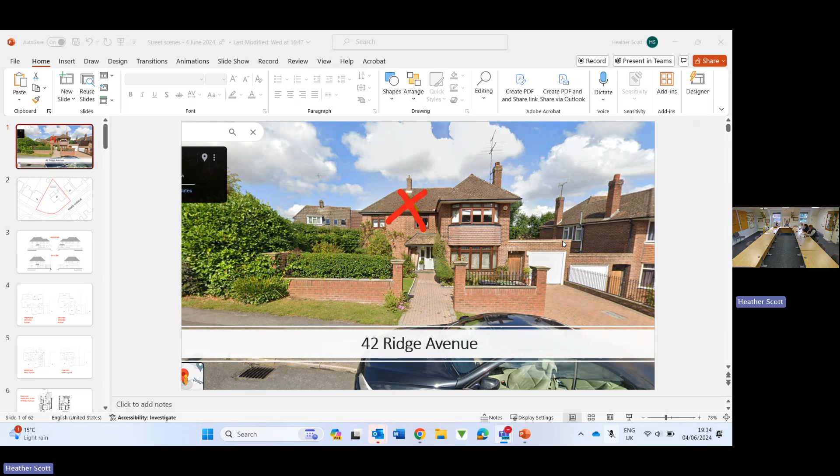Page 10. Right, okay, so you've got your little screenshot packs just in front of you to help you to understand. So 5/2024/0666 and 5/2024/0753 are not required for consideration. So 42 Ridge Avenue. The property sits on a spacious corner plot with the garage linked to the garage at number 40 Ridge Avenue.

The proposal is looking to demolish the garage and replace with a two-storey side extension partially up to the boundary of number 40 at ground floor and stepped in by 1 metre at first floor level. The rear projection at ground floor extends to be in line with the existing conservatory, and at first floor level extends by 1.8 metres beyond the first floor building line. The road slopes downwards towards number 40, therefore the application property already sits on higher ground.

An application at number 40 was approved in March 24 for a two-storey side extension partially over the footprint of the garage and extends much further rearwards than this proposal. This approved proposal removes any possible loss of amenity that could have been considered to the occupants. There are no additional bedrooms, just the addition of bathrooms and a study. The garage is lost as part of the proposal, but there appears to be parking provision for 3 cars on the frontage. Not conservation area, consider no objection.

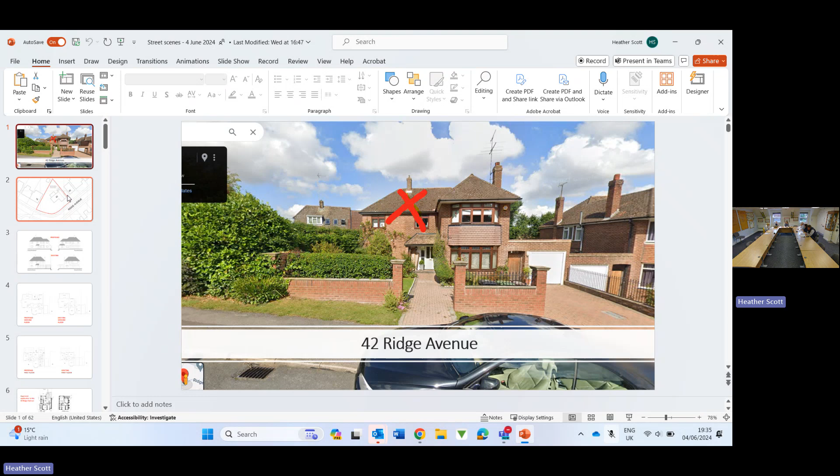And is that number 40 to the right? So number 40 has not done their extension on this photo. This photo is obviously one of my standard ones, from Google Street View. But I did include within your pack the proposals. Yeah, so slide number 6 shows you what they're proposing to do, which is quite substantial actually, to be honest, and that's been given permission already.

Any comments? Anybody objected to it? No. Are we happy with that? Yeah. Happy. Thank you.

Reference 5/2024/0738, 12 Church Field, Harpenden. It's 0748 that didn't meet the criteria. Oh, I missed one. So I think we've skipped the page actually. I'm so sorry. No, I missed that. So 5/24/0293.

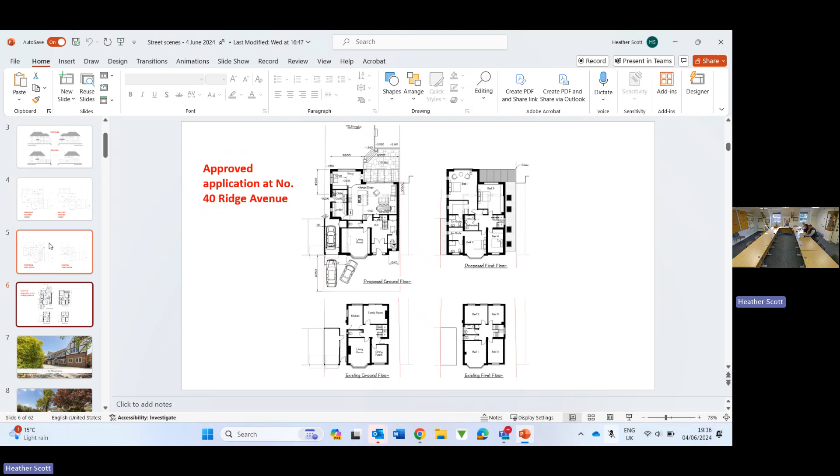Number 19. Okay. The proposal at ground floor is looking to change the 2 existing front bay windows to be box bay under the existing roof overhang and a small infill extension to the side of the existing children's den room to expand the family room. At first floor, it's proposed to add a small extension to the side of bedroom 2, along with the conversion of the existing bathroom to create a bedroom. Internal reconfigurations are also proposed to create a bathroom to the front.

Property is already of a good size and able to accommodate these additions easily with little aesthetic difference. And I say consider no objection. Nothing online, I assume. No, so I'll let you know if there is anything.

The drawing. Oh, you like my colour? Well, the drawing was actually part of the planning application, but the colouring was mine. Oh, right. Just to make it very clear. Very skilled. Yes, a steady hand. Yeah.

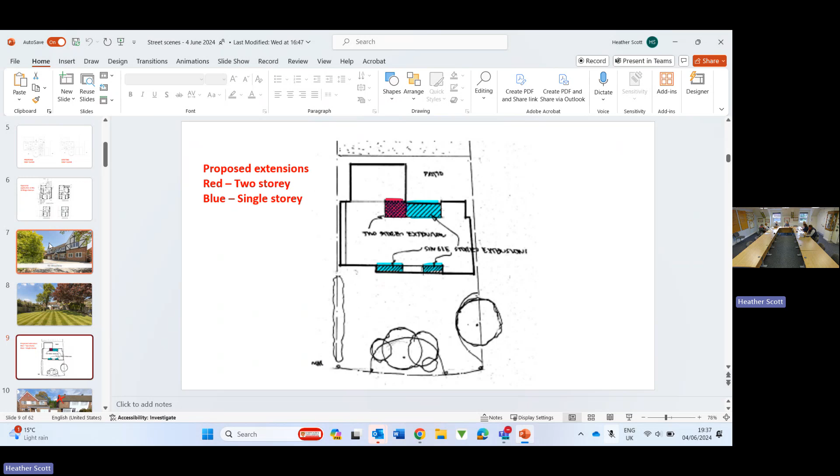Okay, so now on to, are we all okay with that? Yeah, sure. Now on to 12 Churchfield, 5/2024/0738. Okay, the proposal is looking to replace the existing flat roofed entrance porch with a two-storey front extension to provide an enlarged entrance area and ensuite to the master bedroom first floor. Further, smaller ground floor front extension is also proposed to enlarge the living room.

The two-storey extension projects 850 millimetres further forward than the building line of the garage, and the ground floor extension projects 1150 millimetres further forward than the neighbouring property's front building line, which is at number 10. Although the 45-degree visibility zone has been shown to not be obstructed, there are no additional bedrooms being added. And I say consider no objection, subject to no loss of amenity to neighbouring properties. Policy ESG 2 of the neighbourhood plan and 72 of the district plan apply.

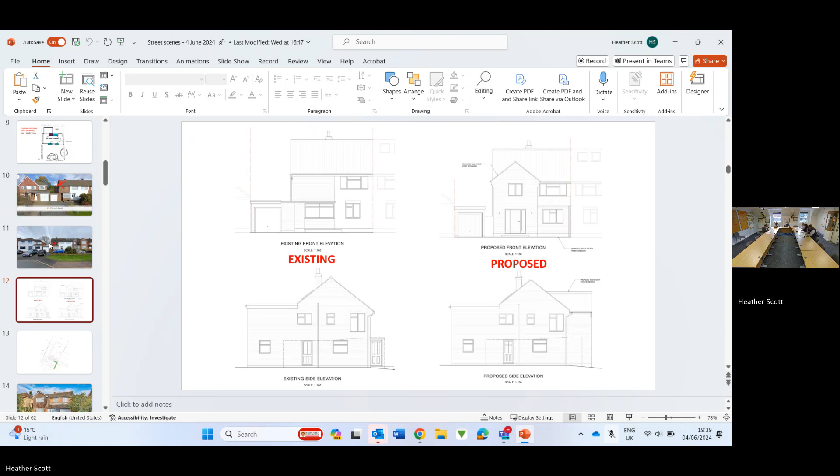Is it semi-detached? Yeah, so it's linked by the garage. Well, actually, sorry, so it's linked to the garage to one side and the semi-detached to the other, yeah. Both the ones either side seem to have done something. Yeah, they have. So, but actually, they're not building over the garage. They're just changing the frontage, yeah. Garage is still staying a flat roof. Fine. Everyone happy with that? Yeah. Yep. All good on that one.

The next one is 5/2024/0739, 6 Townsend. Okay, proposal is mostly adding a wraparound extension at ground floor level to expand the ground floor living accommodation and a porch. There is no extension at first floor level, but the roof ridge height is increasing by 950 millimetres to provide an additional bedroom, which will be 5 in total, and an ensuite in the roof space. Neighbouring property at number 8 Townsend Lane is a relatively new build with a ridge height of 9 metres. This proposal will extend the ridge height to approximately 8.5 metres. 3 dormers and 4 front Velux windows are to be added.

The road slopes up, therefore number 4 sits on lower ground, although the increase in ridge height does not appear to have a detrimental impact on them. The site is in the conservation area. So I say consider no objection, subject to no loss of amenity to number 4 Townsend Lane, and the design and materials are deemed to be acceptable in the conservation area. Policy ESG 2 of the neighbourhood plan, 69, 72 and 85 of the district plan apply. There's no objections from the neighbours? No.

Straightforward. Yeah, so I mean, the ones to the left, if you look in the pictures, this is quite, yeah. I think a number of them on Townsend Lane, to be honest, are beginning to take on that sort of larger change. Yeah. So the only comment that Jane asked me to add in on this was there's obviously been quite a few traffic accidents on Townsend Lane. And maybe some comment around that they enact the correct traffic management or something like that.

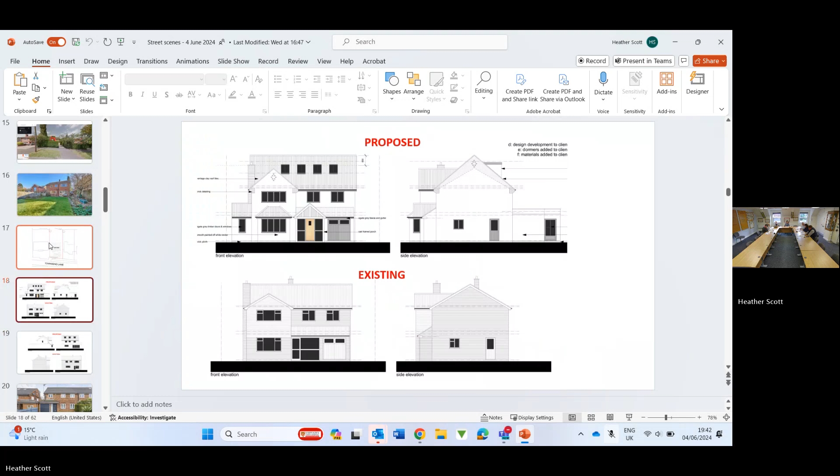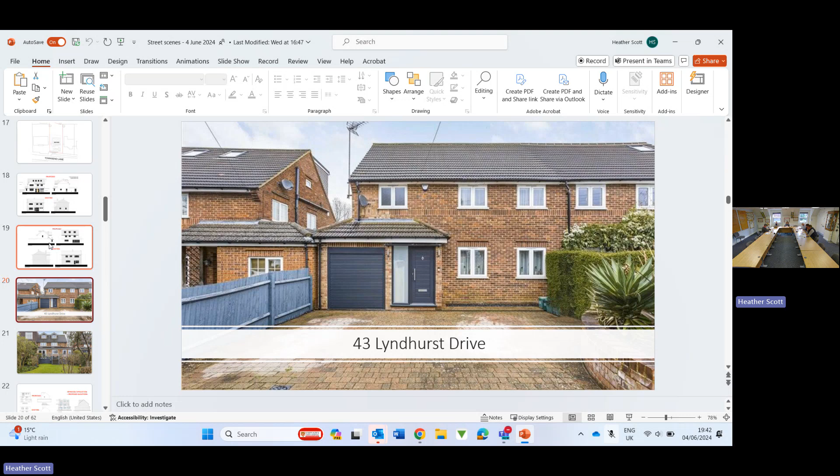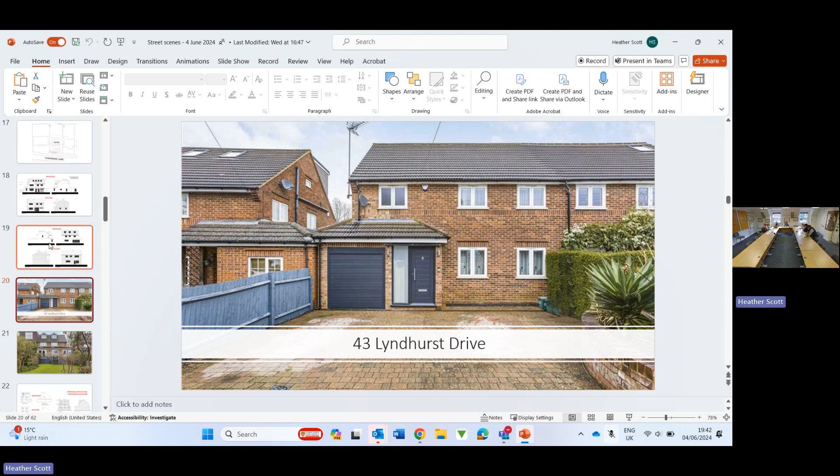Great, so moving on to week commencing the 14th, 17th. 5/24/0235 does not meet the criteria, but 5/2024/0546, 43 Lyndhurst Drive does. Okay, planning permission was granted in 2020 for a very similar proposal to this application, which is to essentially replace the two rear dormer windows with a flat roof dormer from the ridge. This proposal has very minor amendments to the approved scheme in the form of changes to the windows and slightly to the size of the dormer. Photos of the rear of the property show that the connecting neighbouring property already has a rear dormer window similar to this proposal. So I've said consider no objection.

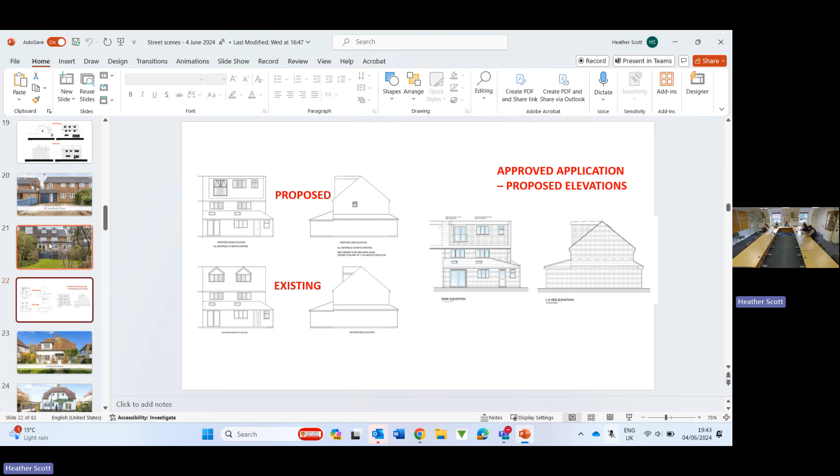Everyone happy with that one? Yeah, fine. Thank you. The next one is 5/2024/0828, which is 9 Stuart Road.

The property has a certain style and character and is locally listed in the conservation area. The proposals are at ground floor level to extend rears by 6.5 metres to fall in line with the neighbouring property's building line at number 11 Stuart Road, and in line with the detached garage at number 7, which is positioned in the rear garden, as is the case with this property.

A new garage to the side, which extends partially down the side, also forms part of the ground floor extension. At first floor, an additional bedroom and ensuite is added partially over the footprint of the new rear extension. A further bedroom, which will total 5, is to be added to the roof space along with Velux windows added to the flat element of the crown roof.

The roof space development is not visible from the street scene. Proposed design and materials appear to be sympathetic to the host dwelling and don't detract from its character. The site is set back from the road with an extended driveway across the verge from the highway with good tree and foliage screening. There appears to be at least 2 off-street parking spaces and a proposed attached single garage also.

No tree works, and I'd say consider no objections, subject to the proposal not being detrimental to the character and style of the host dwelling, which is locally listed in the conservation area. Policy ESD2 of the neighbourhood plan and policy 69, 72, 85 and 87 of the district plan refers. The only comment online actually comes from Herts Ecology, which recommends, due to the age of the property, that a bat survey takes place.

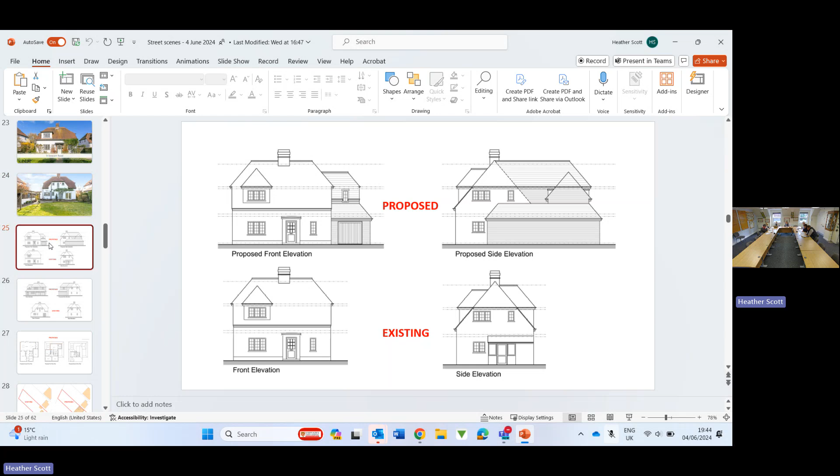Which will be making dramatic changes to the roof. Yeah, it's quite a bit, it's kind of tripling in size, isn't it? Yeah, I think it's one of the original ones, and if you look at the properties either side, they've already expanded. They're definitely extended, haven't they?

Any thoughts or concerns from anyone? Shame, it's one of the traditional houses. Yeah. I'm sure it'll be fine. No objections from me. No, there's no objections. Okay, we're all happy with that one?

Did you want me to add some additional wording to the recommendation that relates to a bat survey being conducted? Just leave it as it is. Would planning automatically do that? Planning will pick that up from what Herts Ecology have said. Yeah, because they were consulted the same as us, same as Herts Highways. So what would you normally do?

I think probably on the basis that it's a recommendation due to the age rather than actually feeling that bats are definitely present, I'm happy to leave it that Herts Ecology have responded with that comment and district will pick it up anyway. Yeah. Okay. Everyone else happy with that? Yeah. Thank you.

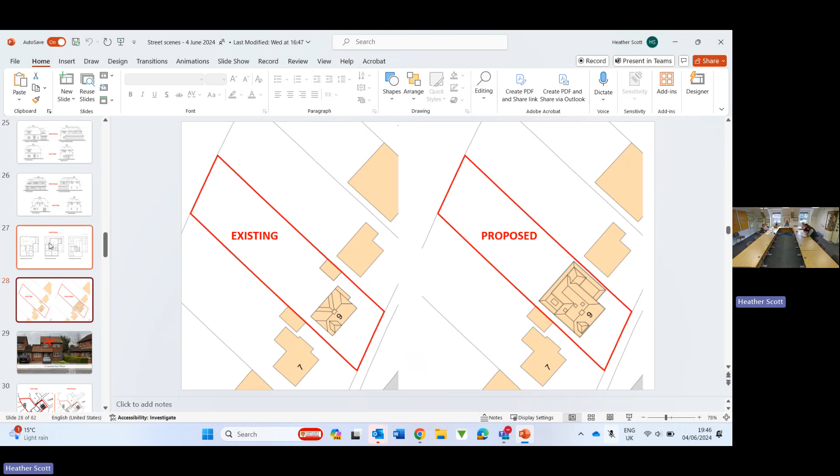The next one, 5/2024/0800, is not applicable. The next one, 5/2024/0818, is 5 Camberley Place. Okay, the property sits on an end plot with a large garden to the side. Proposals are to add a wraparound extension across the rear over the footprint of the existing conservatory and down the side at ground floor level to provide large open plan living accommodation.

A first floor extension is also proposed over the footprint of the side ground floor extension element to add a 4th bedroom at first floor. There is currently a 4th bedroom detailed at ground floor, which is to become a playroom. The properties in the street scene are positioned quite close to each other, number 6 Camberley Place being in quite close proximity to the application property.

There's only a 1 metre gap to the boundary from the proposed side 2-storey extension and a further 1 metre gap from the boundary to the neighbouring property, which could be deemed insufficient to prevent a detrimental effect on them. There is parking provision for 2 cars off street, unchanged from existing. The number of bedrooms based on the drawings also remains unchanged. So I said consider no objections subject to no detrimental impact on number 6 Camberley Place from the proposed 2-storey side extension. Policies of the neighbourhood plan and the district plan refer.

Anything from number 6? No, interestingly, actually, there was a comment from number 45 Cranbourne Drive, which is to the rear, and they supported the proposal, but there won't be any impact on them. But there wasn't anything from number 6 at this stage. It's difficult in corners like that, isn't it?

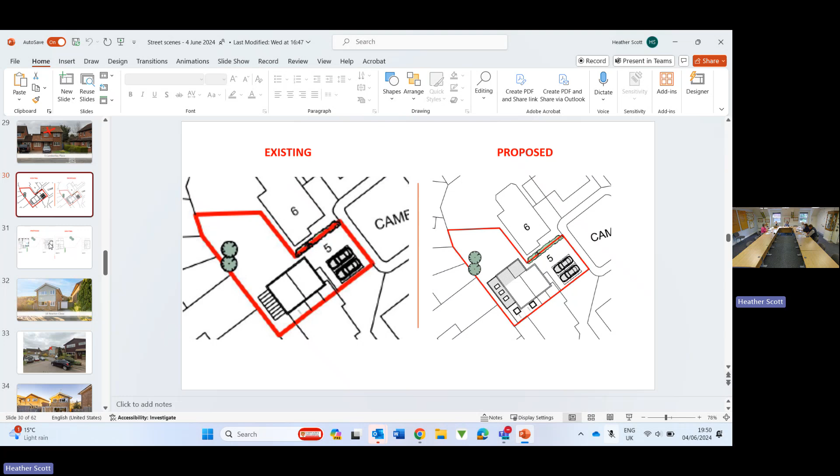What do you feel about that one? No, I think it looks fine, actually. Nothing we can object to, is there? No, I think it's just a case of flagging that it's very difficult unless you actually go and do a site visit to properly visualise and do measurements. I'm doing everything from paper plans and street scenes, so just flag it, as long as there's no detrimental impact on them. Okay. All fine? Yep, fine. Thank you.

5/2024/0821 is number 18 Newton Close. The proposal is to add a 2-storey side extension along the boundary of number 19 Newton Close at ground floor and stepped in by 1 metre at first floor level. The ground floor extension extends 2.6 metres rearward beyond the rear building line over the footprint of the existing store and utility. The first floor extension only extends as far as the existing first floor rear building line.

These proposals add a further bedroom, which will be 3 in total, and there is parking for 2 cars off street. I've said consider no objection, subject to no loss of light to number 19 Newton Close. Policies are from the neighbourhood plan and the district plan. Any thoughts? Comments? Looks fine. All good? Mm-hmm.

5/2024/0713 is 14 Bowers Way. Planning permission was granted in 2013 for a similarly described scheme which was carried out. This application is for further works, which includes a small extension to the rear ground floor to expand the open plan kitchen and living space, and removal of the front store, which presents as a garage, to be rebuilt as an integral part of the property. The proposal is a side extension partially over the ground floor rear extension and partially over the proposed front store to enlarge bedroom 1 and add a bathroom.

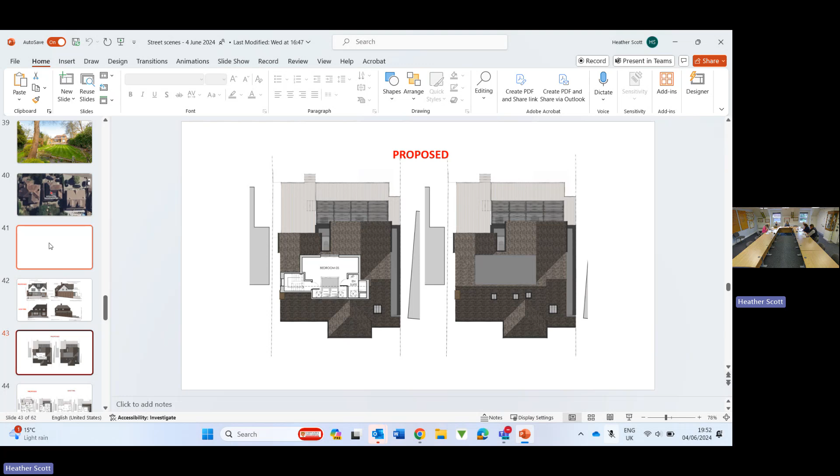Policy ESD2 of the neighbourhood plan, 69, 72, 85 and 87 of the district plan. Now, there is actually an objection online from number 12 Bowers Way, which is... is that to the left? Just double check. Yeah, look it over. I think it's the house to the right. Is that one there? Yeah, so it's the property to the right.

So their objection is the extension is substantial in size, therefore the first storey rear extension will block the light in our living room. It will be overlooking our garden, which will impact our privacy. And the ensuite bathroom window on the side is overlooking our house and bedroom, impacting our privacy. So I'm not quite sure. It's difficult to understand on the basis that their house is beyond the building line.

Which is it? We're looking at the helicopter view. Is it the one on the left or right? I'm just going to be absolutely sure. Which view are you looking at? So I think that is that one there. Is that the one that's complaining? Yes, so as you're looking at it from the front, it's the property to the right. Because if you look at the shadows, yeah, so it's this house. It's the one to the right on the front view, one to the left on that view. I see, so here we go.

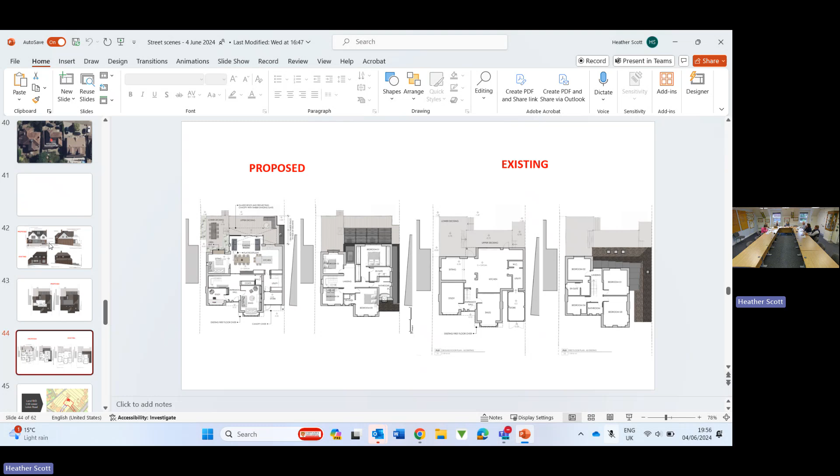You've not mentioned any loss of amenity in the comments. You don't believe there is? No, because it doesn't extend back as far as the neighbouring property. For you to create a loss of amenity, you need to be either coming up higher or going further back. I can't be sure, but I would reckon that tree is in their garden and there's much more loss of light from that tree on that back garden than there is from the building next door.

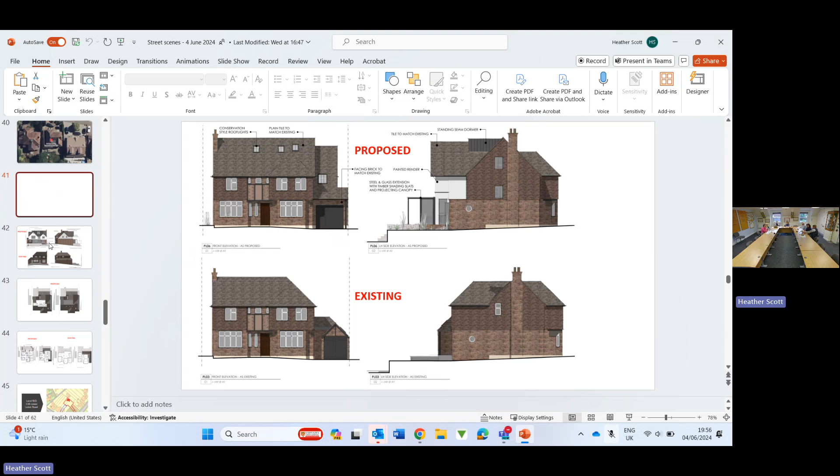So when you look at the proposal from the front, the ridge line to the extension to the side is stepping down, not as high, stepping it in, so it doesn't go back as far. Everyone's obviously entitled to their view. You can see from that front view photograph that the next door neighbours have got a window on the side. Is that what they're complaining about? So their wording was, the extension is substantial in size, therefore the first storey rear extension will block the light in our living area, overlooking our garden, which will impact our privacy.

The ensuite bathroom window on the side is overlooking our house and a bedroom, impacting our privacy. Well, an ensuite bathroom is going to be obscure glazed, so don't need to worry about that. I'm not sure how it's actually looking into their garden any more than what they would do at the moment.

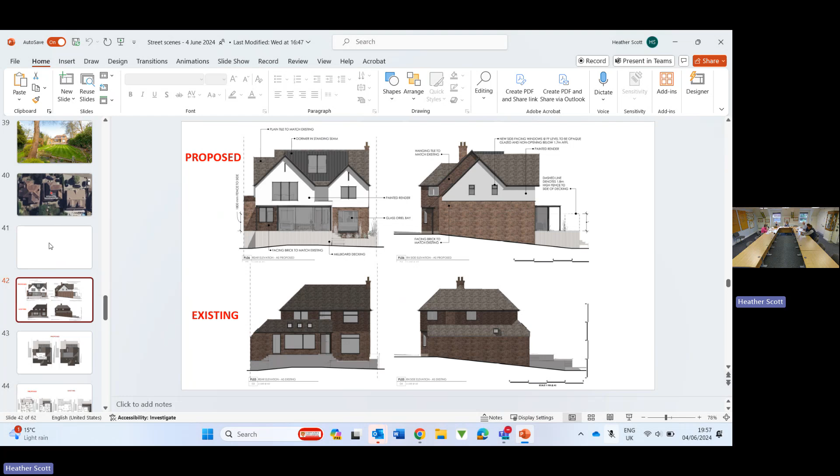Yeah, the back gardens are downward sloping, so both houses take a look at both gardens. I mean, I don't see how it's any more than it is now. Grow another shrub. Okay. Are we all happy with what Heather's written on? Yep. Thank you, Heather, that's fine. Okay.

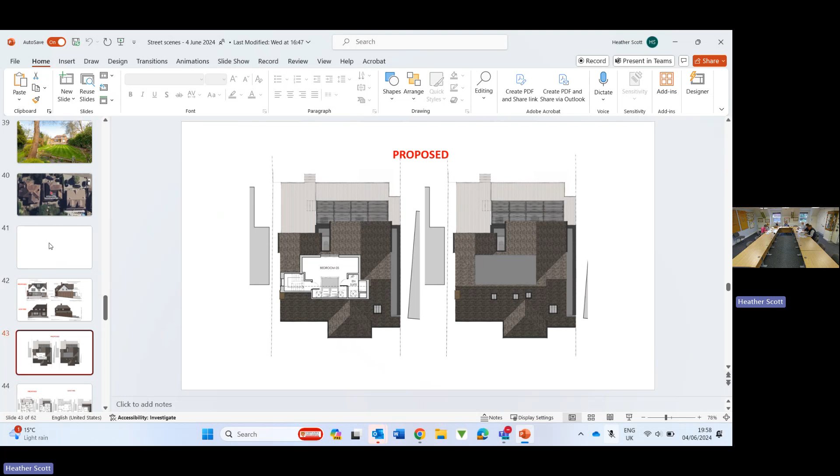I think I've got this one out here now. That was Bowers Way, isn't it? Yeah. Okay, so then we have 5/2024/0799, which is meeting the criteria, and then we go to week commencing the 24th. And we have 5/2024/0692, 118 Lower Luton Road.

Okay, planning permission was granted in 2021 for a dormer bungalow on the site, but has not been constructed, and the permission has now lapsed. This application seeks to enlarge the footprint of the proposed house to what was approved and add a further 2 bedrooms to total 5. Permission was granted for 3 bedrooms. The site is at the end of the gardens, number 116 to 120 Lower Luton Road, and is accessed across the forecourts of the council-owned garages on South View Road.

There's an infill property located to the rear of number 1 South View Road, which is number 1A, which sits close to the proposed dwelling, which could be affected by the increased size property to that which was approved, given that the roof form is much larger and the dwelling sits close to the boundaries. The land slopes upwards from the rear of Lower Luton Road, therefore the property sits on higher ground to Lower Luton Road. There is parking for 4 cars.

I've said to express concern that the proposed dwelling could have a detrimental effect on number 1A South View Road due to the close proximity of the proposed dwelling to the boundary and the increase in roof mass to the previously approved application. Policy ESC 2 of the neighbourhood plan, and 69 and 70 of the district plan. Highways have no issue, but the fire have a few concerns.

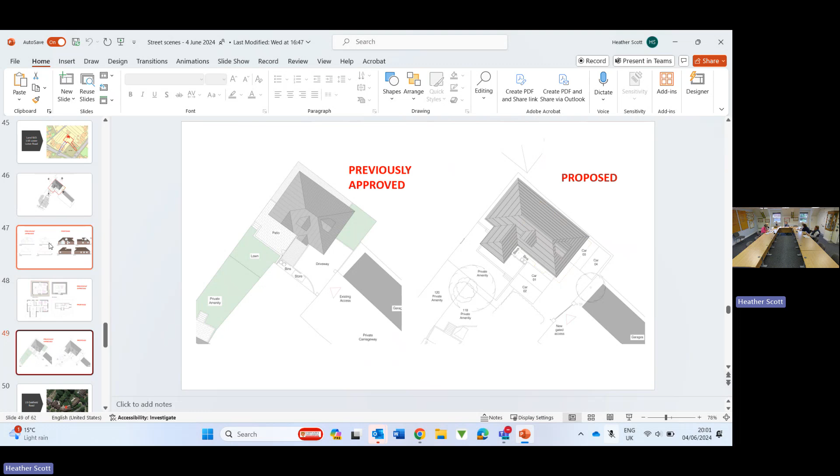I suspect the access to the garages is not 3.7 metres wide. Yeah, I agree with that. And if you've got anyone double parking, then you've created a hazard. Has fire raised an objection because the size of the house is getting bigger? Or was it always the same? I think it's a new house, isn't it?

It is a new house, so I don't know, and I didn't look back to see if fire expressed concerns when the old one was previously approved. Oh, right. But they've commented on this particular occasion. It's basically taking the 2 back gardens and putting them together to make a plot. But planning permission was granted 3 years ago, so we're a bit unsure why fire. They may not have commented, they might have missed it. Well, fire know what they're doing.

Yeah, so I'll pick that up today. And they also mention it appears that from the plans provided, there is no turning facility for fire appliance on the access route, which is a dead end of greater than 20 metres. So they're basically saying, you know, if you have a fire, we may not get there. Yeah.

Yeah, I honestly don't know. So do we need to put anything else in with regards to the expressed concern, or does that just get fixed automatically? Well, we can do. I mean, the difficulty is that the access across the garages, they don't own that right of way. I think you'll probably find it's actually council owned, and they've probably got a wayleave or some sort of deed of access across it. Yeah.

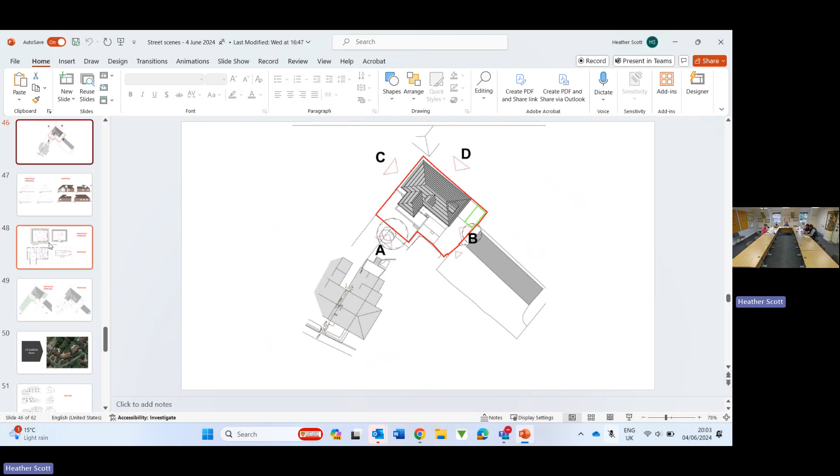So being able to create the access, I don't know what they're referring to, because it doesn't stipulate, and I probably could have done a scale. I don't know if they're referring to the access across where the garages are, or the access into the plot. I mean, the alternative, I would have thought, is the next door one, which is basically the same. If you look at the back of the garages, there's a site that goes up the side. Yeah, potentially. So that goes up to 1A. Yeah, and if you smile nicely or whatever. So if you look at that, there's quite a big access point there.

Whereas you can see where the council garages are and where the council car park is. Council owned, HTC or SADC? SADC. Yeah, no, we don't own any garages. Is the car park SADC? Yes, Southview.

So is the question, do we want to add anything in from the fire perspective, or will it just get picked up? I mean, it will be picked up, but we can highlight it. There's nothing to say that we can't comment, to say that we note that the fire service have expressed concerns, and we would obviously encourage this to be resolved. Yeah, yes, please. Thank you. Leave it with me.

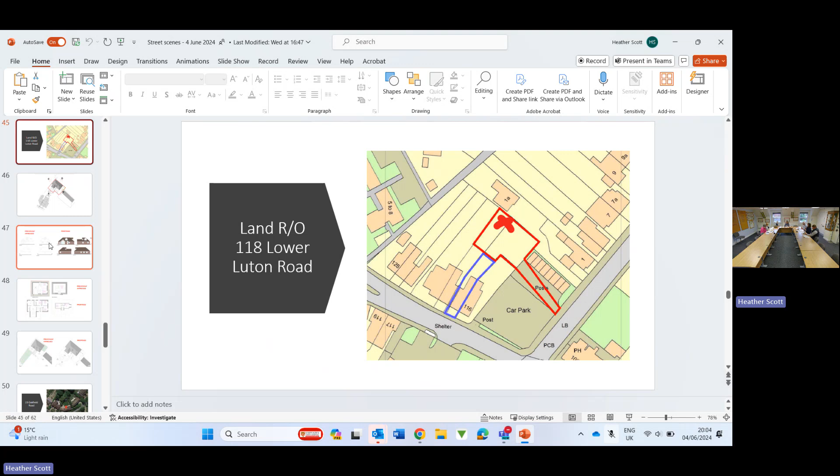So the next two do not meet the criteria, which is 5/2024/0853 and 5/2024/0725. And then 5/2024/0839 of 19 Oakfield Road does. Okay, the property sits in a corner plot on the junction with West Common Way and overlooks woodland. It's proposed to add accommodation in the roof space, which is a bathroom and 2 bedrooms, which will total 6 across the property. This is to be achieved through the addition of 3 rear dormer windows and 3 front roof lights. There is no increase in ridge height.

The 2-storey centrally located front extension is also proposed to provide a large entrance hall, a shower room at first floor, and reconfiguration of the existing stairs, which enables the stairs to reach the newly proposed second floor. The existing attached double garage is to be converted to accommodation of an unknown purpose. They don't actually explain what it's going to be. And a new attached double garage is proposed to be added to the front with accommodation in the roof space.

There appear to be other properties in the locality that present with a similar frontage and scale. There's parking for 3 cars off street and the proposed double garage. Not a conservation area. There is actually a comment online, which is more of a comment rather than an objection, from number 44 West Common Way, which is directly opposite.

Yeah, it's the contemporary style house that almost doesn't have walls. It basically has glass as walls. So they're concerned over the addition of extra lighting, extra external illumination. So: plans look lovely. Good luck. Only comment request would be to please take care on luminaire choice for the central feature window.

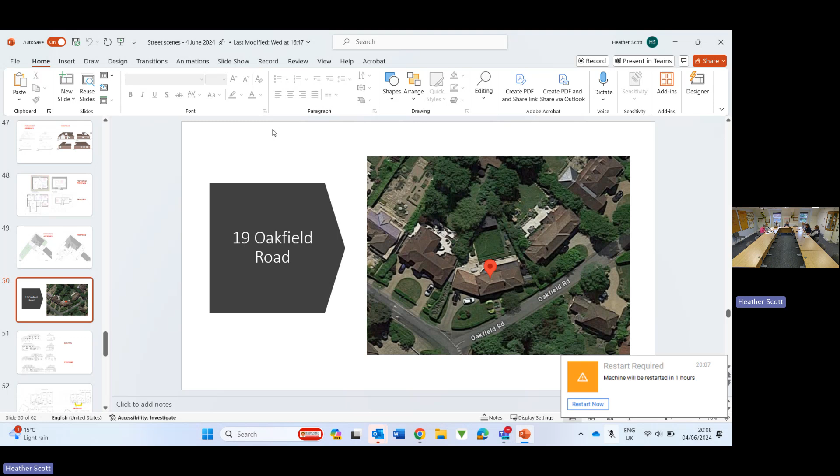5/20/24/08/47 does not meet the criteria. But 5/20/24/07/50 does, which is 27-29 Bowers Way. Currently number 27 is a 5-bedroom residential dwelling, attached to number 29, which is a single-storey flat roof dental surgery. The proposal is to convert the ground floor of number 27 into a dental surgery, providing a larger practice than is currently possible at number 29. The first floor of number 27 is to become a 3-bedroom flat. At 29, only internal reconfiguration is to take place to convert it into a 2-bedroom family home, therefore a net gain of an additional dwelling.

Visually, there was very little change to the existing. The addition of a rear dividing fence and separation fence from the dental practice, the side access door for the first floor flat, and an access ramp to the front of number 27 is all that is materially proposed. There is a rear garden for each residential unit and parking on the frontage. Patients at the dental practice do not currently have on-site parking, and the site is next to a public pay and display car park, so parking will be available close by. Properties are in the conservation area but are not locally listed. Consider no objection.

Then moving the dentist. Basically, yeah. It's a bigger plot, bigger building. Is there any change of use in that then? Will that just get covered automatically in planning? It'll be under licensing. Well, actually, no, sorry, there is the change of use as part of the application. But you've got a dental practice there anyway. Yeah, they own both sides, so they swap. That was the extent. Just a bit of a tick box exercise, really. Thank you.

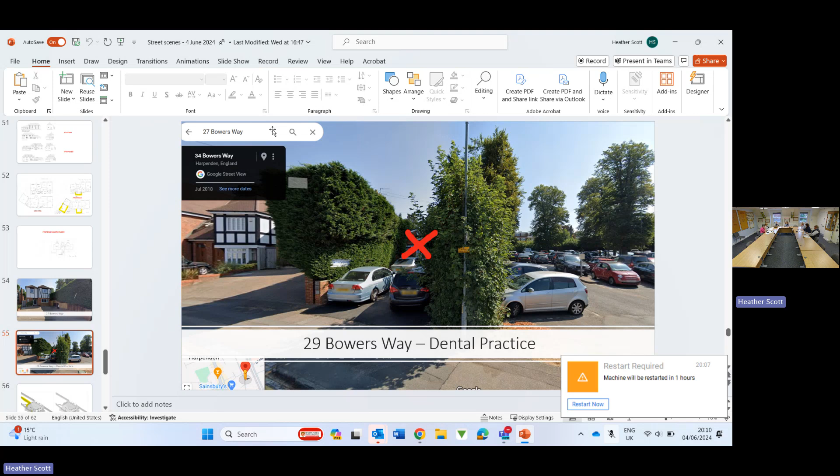5/20/24/06/02 and 5/20/24/08/65 do not meet the criteria. And then the final one for today is 5/20/24/08/72, 6 Barnsley. The proposal is to extend across the rear at ground floor level to create open plan living accommodation along with a side extension to the lounge to facilitate a gym. A first floor extension is to be added over the flat roof garage element to add a bedroom.

The number of bedrooms is not increasing due to reconfiguration of existing bedrooms to provide an ensuite and dressing room. There appear to be other properties in the street scene that present with a similar design and form. Proposals do not appear to have a detrimental impact on the neighbouring properties, not conservation area. No objections, subject to notice to neighbouring properties. Policy is D2. Comments? No comments. Okay. Thank you.

Okay, so, got an appeal? Yeah, so you just need to note that 42 Manley Avenue are going to appeal. That's the only one, the appeal. And then tree works, just note that one, and then decisions are in the report. So the decisions, just very quickly to update you on some of the more interesting ones. What page are you going to? We're going to page 24.

So I've just highlighted the ones that were interesting. The Elliswick Lawn Tennis Club, I don't know if you remember, it was some time ago. So that has been granted planning permission for its lighting. I'm going in there on Saturday to dedicate their centenary clock. But yeah, so they had got planning permission.